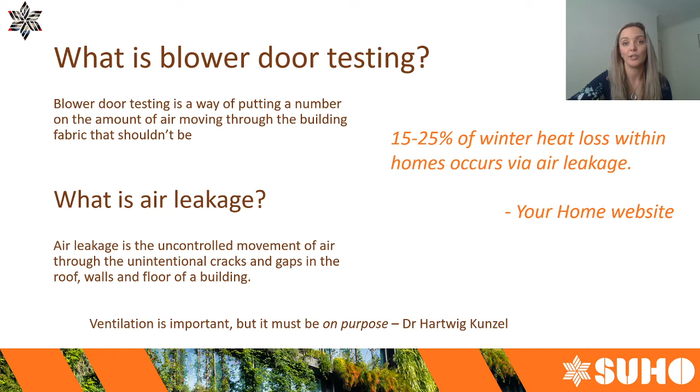So during a test, we will bring equipment to site. Prior to coming onto site, I'll work out the size of your building, the square meterage of the building envelope, and that will help me to work out how much equipment I need. In a typical house, we won't need any more than one fan. In office buildings and larger buildings, we often require many, many fans. So the biggest test I've done has been 8. Typically between 3 and 6 fans is required for most of the office building tests that I've done.

The fans are installed in a temporary frame that gets installed into external doorways in the building. The fans are then all hooked up with tons and tons of wires and hoses to make sure that the information is being read from the right place and delivered to the right place. And then we turn the fans on and we exert negative or positive pressure on the building. The equipment that we bring along measures how much air is required to pressurize that building to 50 pascals, whether that's negative or positive. And then the readings are all pumped through to the computer.

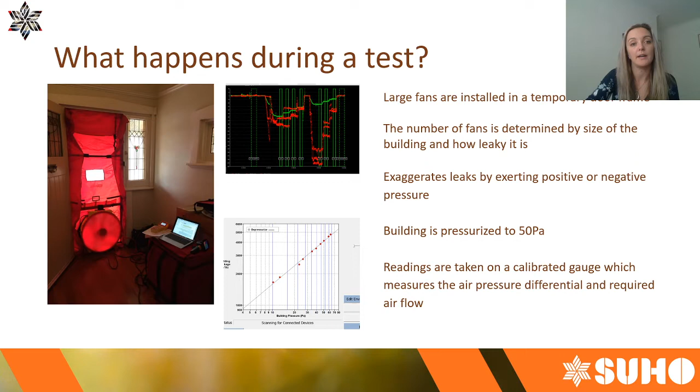So the top graph that you can see is the readings that are taken from a test with more than one fan. You have to use different software if you're using multiple fans than if you are using only one. So the bottom graph is a one fan test, and all those red dots are readings. The readings are taken at different intervals, up to 65 or 70 pascals and down to about a minimum of 10 pascals. So all of the readings are taken at various intervals and then the results are worked out based on those intervals. The results are always represented at 50 pascals though.

So finding leaks is the fun part. There are a few ways that we can do that, and we look around these areas in this picture. This is a typical older house, lightweight cladding, could be block work or double brick. Just for argument's sake, this picture was taken off the Your Home website, which is a very useful resource.

And this house has got a timber floor, it's got a chimney, it's got an air conditioning system in the wall, it's got a vented skylight. This house is a typical example of where you might find a lot of leaks in a typical older home. It's got air vents in the walls that have been designed into those older types of homes. And then other things like electrical and plumbing penetrations, downlights, exhaust fans, taps, anywhere where there's a hole being put in the fabric of the building.

The floors in these really old homes are a big leakage point as well. Just as a fun fact, I don't come across many of them, but the ones I have come across, the floor is a big factor. I actually have a friend who says that she gets dust on her floor that comes up between the floorboards. So I'm sure she's not the only one.

So to find the leaks, the most common way is just by feeling with our hand. And that can be quite a fun exercise to go through with the client, just going around and pointing out stuff to them that they wouldn't have otherwise thought of. So that's this little thing here. We go around all of these junctions, doors, downlights, windows, any penetration, we go around and feel for leaks.

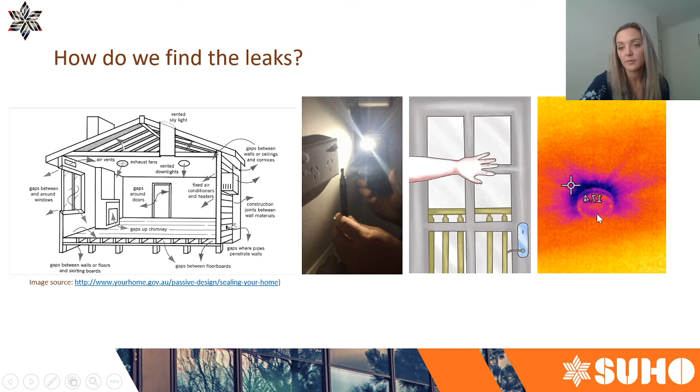And then thermal imaging is another really cool way of identifying leaks. So this picture here, you can see the purple splashes around that fitting there. The purple splash marks are air leakage. Next slide. Here's some more thermal images of some air leakage. This one here is an air conditioning vent leaking quite a lot.

This one was a really fascinating job. This was supposed to be a 7.5-star home that was built north of Adelaide about 10 years ago. We actually did the energy assessment at SUHO. And when I went to visit this home, the clients were complaining about being extremely cold in winter, and I took a tradesman with me on the day, and we tested the house and identified tons of air leakage pathways that we were able to fix up quite quickly.

But all of the windows in this house leaked like this behind the architraves, every single one. So this was a really good example of where leaks were happening all through the house, all through the downlights. They'd cut a huge hole behind the fridge, about yay big, to ventilate the fridge, that went directly out into the shed.

So things like this, they just hadn't thought about the knock-on effect of what they were doing. They had a reason for what they did, but it affected the comfort of their house in the meantime, and then the construction quality just wasn't there. So the 7.5 stars in practice wouldn't have been anywhere near it, because the house wasn't built in accordance with how it was supposed to be built.

This one here is a picture of a missing insulation batt. This is another really, really common defect that we find in new houses, where the electricians have disturbed the insulation to do their work and then not replaced the batts. Something like this is invisible unless you actually get up into the roof, which most people don't do, or you have a thermal imaging camera and someone who knows what to look for.

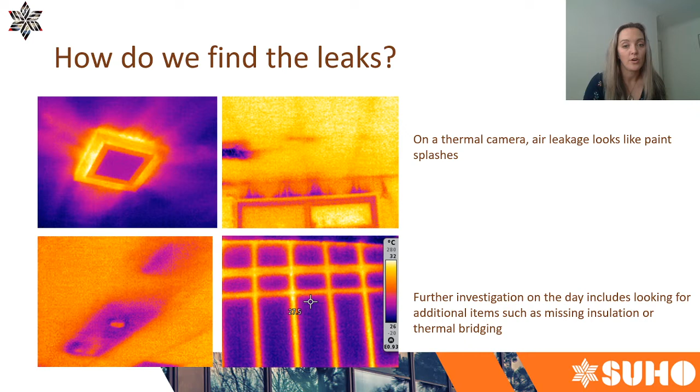The bottom image is a steel framed home. So as you can see, the frames on a steel frame home light up big time. There's a lot of thermal bridging going on there, bringing outdoor temperature straight indoors. So these two bottom images aren't much to do with air leakage, but they still impact the comfort of the home, and they are part of what we look for in an audit process.

The red pen test is something that if you've identified that you need an air tightness strategy for your build, then you will need a red pen test. I mean, it's called a test. It's not actually a test. It's just a drawing. So you grab a red pen, or it could be blue if you want. It's just red for the purposes of demonstration, and you draw a line around your air barrier.

This line generally follows the insulation. It's a thermal barrier as well as an air barrier, generally speaking. So it's going to separate unconditioned zones from conditioned zones, typically car parks, parking areas, plant rooms in commercial buildings, things like that.

As you can see in the image on the right, the garage has been excluded from the red pen test in a residential building. And the reason for that is that it's cold out there in winter, it's hot out there in summer, there's all sorts of chemicals and dust and things in a garage that you don't want entering your home.

So you're going to draw a line around that and identify to the trades on site that this barrier between the house and the garage needs to be complete and needs to be airtight, so that the fumes don't come in, the heat and cold doesn't come in, and the integrity is maintained.

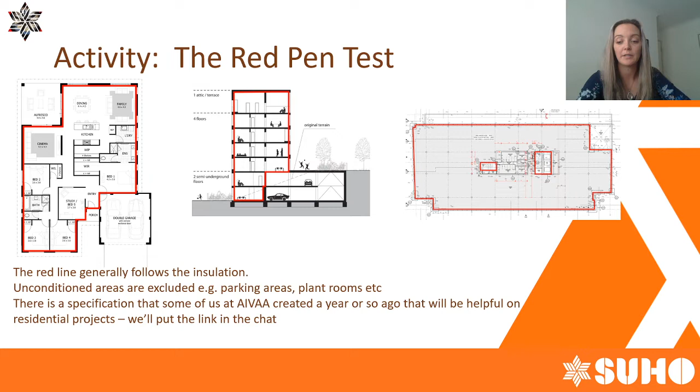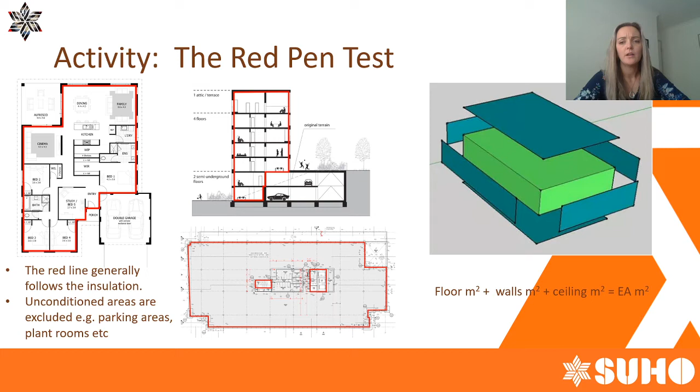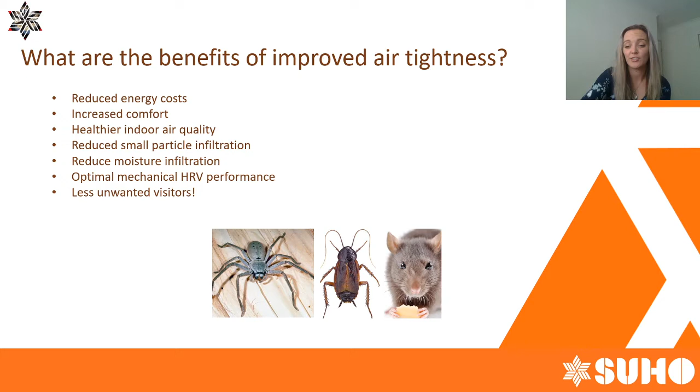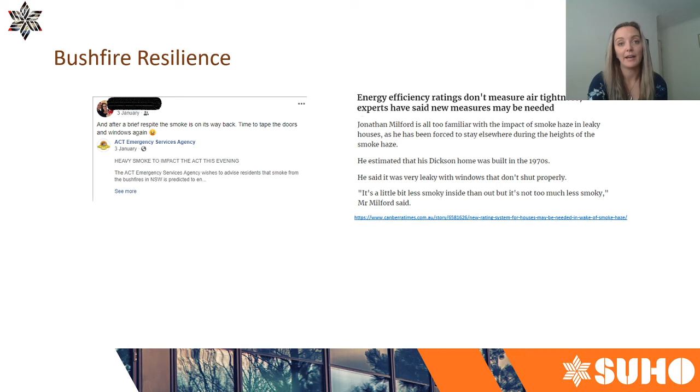My friend had a small baby at the time, so this was quite a scary time for her.

Air tightness also helps resist ember attack. So if you ever see footage of a fire front where there's a helicopter or a drone or something that's taking footage from up high, you can see there's maybe a fire front that's come across and then there's spot fires. Or you might just see footage of a spot fire where one house is burnt down in the middle of a paddock and everything else around it has not been touched. I know I've seen that a few times. Those fires were caused by ember attack.

Now, air tightness will not only prevent smoke from getting into your house, it will prevent embers from getting into your house. Because what happens is the embers settle inside window frames, or any other nooks and crannies where they can kind of get comfy, and they smolder. And behind windows, there are usually curtains which catch alight. So this is how fires can very easily start.

So these embers can travel up to 40 kilometres. So spot fires can occur well ahead of the fire front. So just because you're not in the flame zone or any of these other bushfire attack level zones doesn't mean that you are not going to be affected. The lower BAL zones are actually based on the likelihood of ember attack.

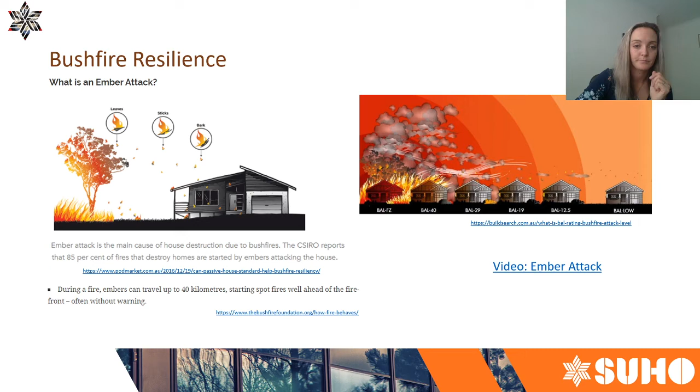So embers typically get in, or the opportunities are there for smouldering and ignition, in gutters, underneath doorways, through cracks around window frames, gaps in roof spaces, and under floors, so under timber floors if there's debris under the floor. So obviously there's the risk of leaf litter on the ground, the fuel load on the ground, that is going to increase your risk.

But if your building has had an air tightness strategy or had a blower door test and you've addressed some of the air tightness issues, it's not going to stop your house burning down if you're really in the way of the fire front or if the fuel load catches on fire. But if you have a sneaky little ember or a few embers, it will reduce your chances of those embers settling in and catching on and igniting the rest of the materials around it.

The AS3959, which is the construction in a bushfire zone Australian standard, addresses combustibility of materials, and it addresses distances from vegetation and things like that, but it doesn't address air tightness. So I'm hoping that the next revision of this standard might possibly include a blower door test, because that would be a very sensible new strategy, in my opinion.

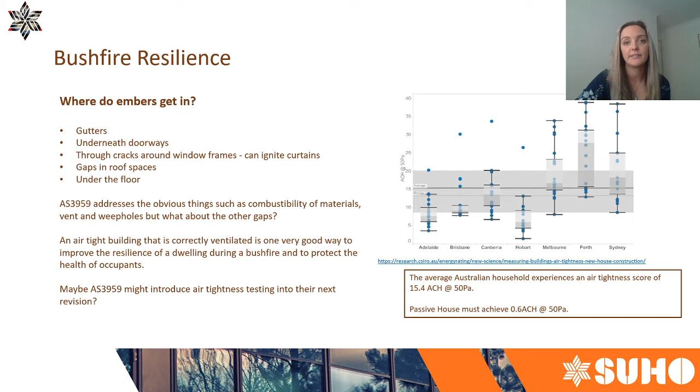This is an optional test at the moment. It's a performance solution for the building sealing section. So you don't need to do this test, but you can if you want to. And someone like me would recommend it purely because it puts a number on something that's invisible. And I don't know, I guess I just like to know. I'm a bit nosy and curious like that.

So I've tested my house and it gets about 12. And I'm getting mice and stuff. So that gives you an indication. Because the mice aren't coming through open windows or doors. They're coming in under the, I don't know where they're coming in, cheeky little buggers.

So you may have noticed that I've been talking about air changes per hour on this slide, and now I've switched to cubic meters per hour per square meter. So there's two different ways to talk about air tightness, and one is air changes, one is cubic meters per hour per square meter. In a residential application, they're pretty much the same thing. So we won't worry too much about talking about the difference between the two.

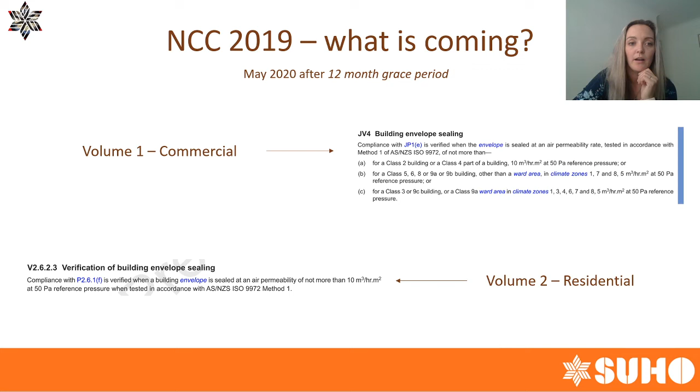The air changes per hour and the cubic meters per hour per square meter are both talked about quite commonly. Air changes is mostly used under a residential application. Passive House uses it. The cubic meters per hour per square meter is used more commonly under a commercial setting. And there is a reason for that, but I won't go into it now.

They are the people who list all of the testers in Australia, the ones that are qualified to do these tests. There are about 50 of us in Australia, and in order to qualify for the points, you have to get one of these people. You can't just get any old person, not that anyone who isn't registered will probably have a fan, because the equipment's expensive, and if you can't get the work because you're not on the ATTMA register, then that obviously doesn't make sense. So you have to make sure that you've got someone off of this list to do the test for you. You also have to make sure the person who you choose off of that list has got the experience and the equipment to actually carry out the test.

There is a very broad range of skills and experience on this list. So just do your due diligence whenever you're picking your contractor and make sure that they know how to effectively and properly carry out a complex big building test.

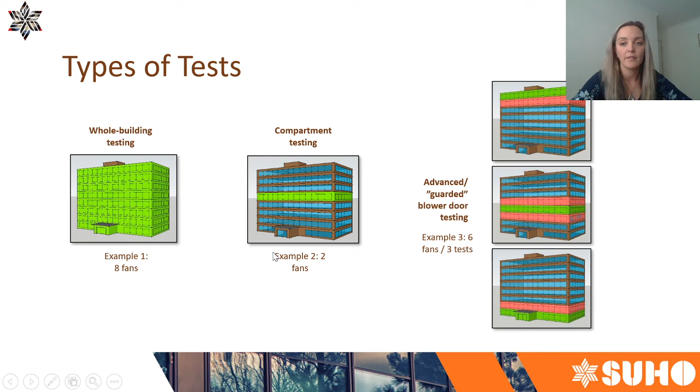There are also innovation points available in air tightness. So you can have 1 additional point for achieving the next level up, and then you can get 2 additional Green Star innovation points for achieving best practice. There's a little bit of jargon in here about what areas of the building you have to test. Unfortunately, this wording here allows this test here to happen. This compartment test, which, as I mentioned to you, the numbers that you get out of that test make absolutely no sense.

So it's quite problematic, and we have colleagues in the industry who have been chatting with Green Star to try and nut that out a bit and make it make a little bit more sense, because the perception is that that kind of testing is the cheapest, easiest way to test, and people just want 1 point, and it's a bit of a waste of time.

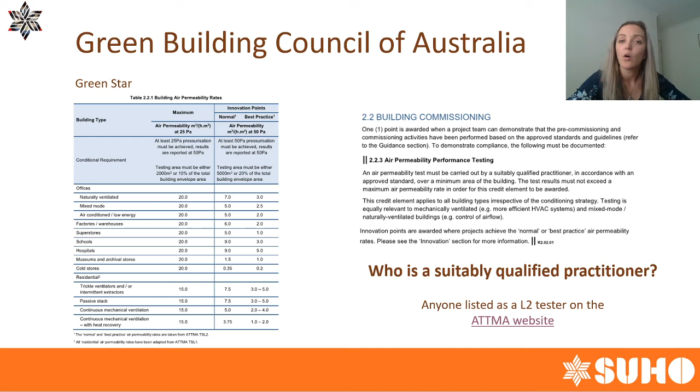So having a bit of a think about where Australia sits in comparison to the rest of the world, our average is 15.4 air changes per hour. I've got some switching out in jargon here, but that's just the nature of the beast, unfortunately. The UK code minimum is 10 cubic meters per hour per square meter, and I think they actually have to do 2 tests, one halfway through the build to test the air barrier, and then one at the end.

And it's the case over there where sometimes you can't get occupancy without a compliant blower door test. The guy from ATTMA tells funny stories about how there's trucks in the driveway waiting to move people into their new house, but the blower door contractor says, sorry, this test failed, and the people can't move in. So we're not quite there in Australia yet. We've got a long way to go before we've got some mandatory testing in place.

The option in the building code, as I mentioned, is optional. But we're on the right track because it's now at least in the building code and people are talking about it, and people such as yourself are learning about it. So that's good news. Passive house has to get 0.6 air changes. Department of Defence have got very similar guidelines to Green Star. So these figures here are more or less aligned. They get their benchmarks out of the ATTMA standards.